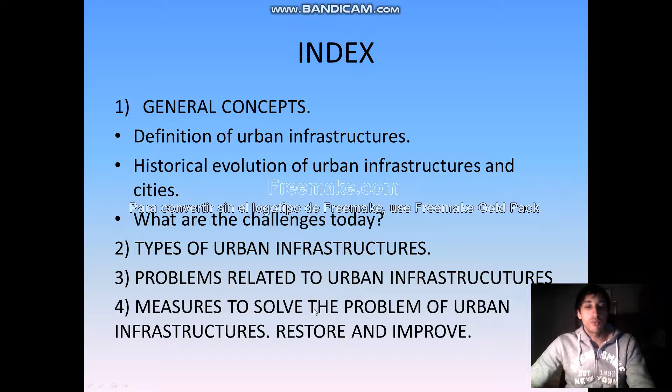Let's begin! This is the index. In the first point we will learn about general concepts such as definition of urban infrastructures, historical evolution of urban infrastructures and cities, and what are the challenges today. The second point is about types of urban infrastructures. Then we will study the problems related to urban infrastructures. And finally, the most important point, measures to solve the problem of urban infrastructures, restore and improve.

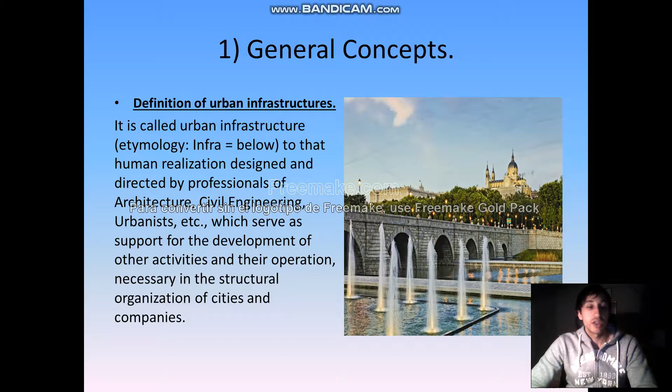What is the definition of urban infrastructures? It is called urban infrastructures to that human realization designed and directed by professionals of architecture, civil engineering and urbanists, which serve as support for the development of other activities and their operation, necessary in the structural organization of cities and companies.

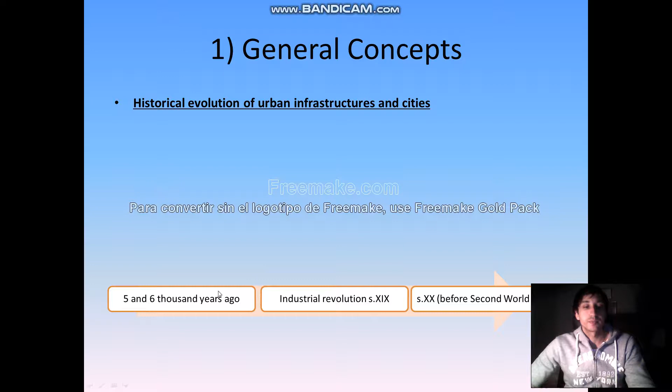Historical evolution of urban infrastructures and cities. The first phase began between 5 and 6,000 years ago with settlements that became what we know as the ancient civilization of the Valley of Mesopotamia, now Iraq, Egypt, India and China. The first settlements depended mostly on agriculture and domestic animals.

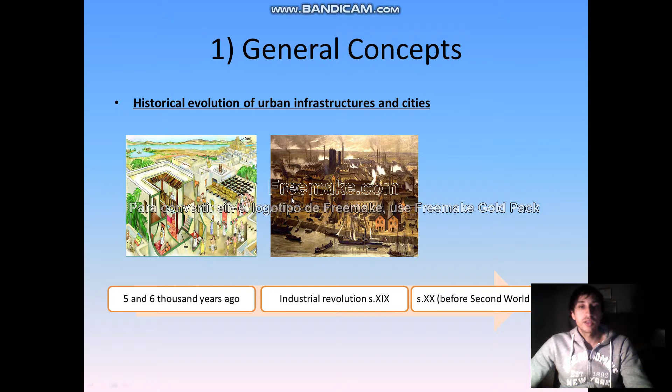The second phase in the development of cities came later, with the Industrial Revolution in Europe in the mid-19th century. The factories needed a large number of workers and commercial activity grew, creating new opportunities in the cities. Looking for work and a better life, people moved from rural areas to cities in large numbers, something never before seen. And finally, the third phase began after the Second World War, the longest and fastest growth in the urban population of the world has arisen in the 1950s. As the world economy became international and grew in size, cities around the world grew by leaps and bounds.

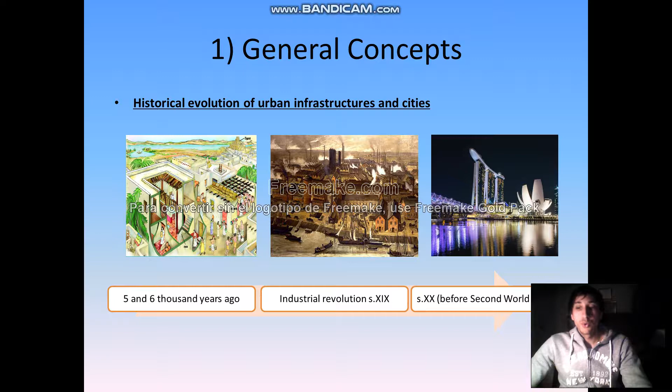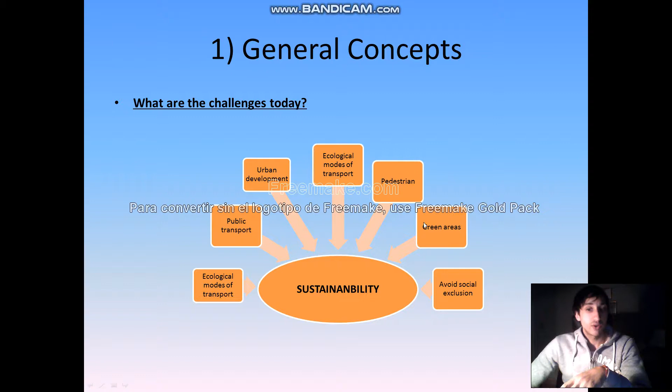What are the challenges today? The main challenge related to urban infrastructures is sustainability. The question is, how can we achieve the sustainability? The answer is very simple: through ecological modes of transport, public transport, urban development, pedestrian areas, green areas, and avoiding social exclusion.

The point number 2 is about types of urban infrastructures. We have the following types: transport, hydraulic and energetic infrastructures, telecommunications, and building infrastructures. Transport infrastructures, for example, terrestrial roads, highways, maritime ports, and air infrastructures, for example, airports.

Hydraulic infrastructures, we have drinking water networks, sanitation water networks, and waste management. Energetic infrastructures, such as electricity network and fuel networks, oil pipelines, gas pipelines. Telecommunications, we have TV networks and phone networks. Building infrastructures, for example, small infrastructures such as schools, hospitals, libraries.

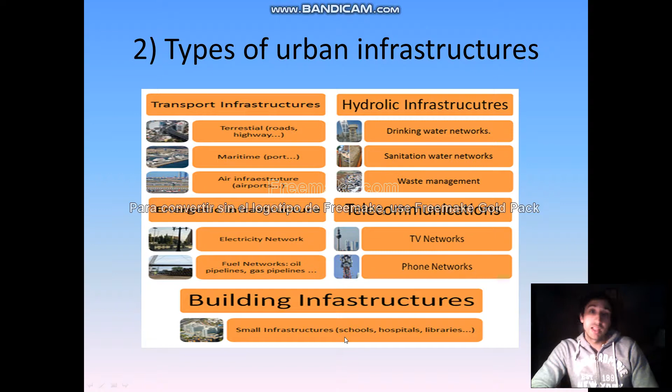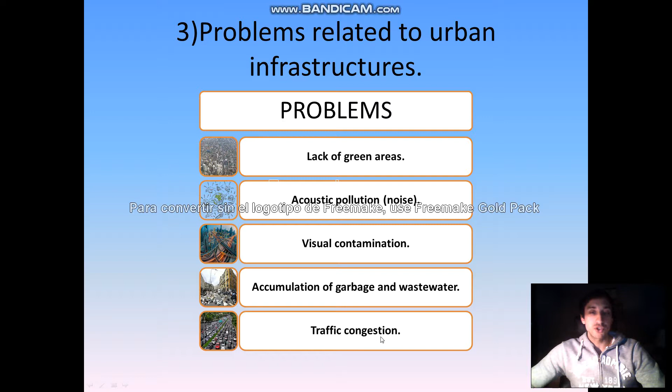This point, as I said before, is about measures to solve the problem of urban infrastructures, restore and improve. We have the following problems: lack of green areas, acoustic pollution, visual contamination, accumulation of garbage and wastewater, and traffic congestion.

A lack of green areas can affect the health of people and causes, for example, respiratory diseases. Some measures to restore and improve this problem are, for example, use and build on abandoned land for the creation of parks, improve and restore river banks, and increase the provision for planting trees.

Another problem related to urban infrastructures, as I said before, is acoustic pollution. The acoustic pollution can affect our ears, coronary problems, aggression, and hormonal problems. Some measures to restore and improve this problem could be installation of noise and sound insulation screens, improve the condition of the streets, especially the pavement, and improve infrastructures with the construction of underground works.